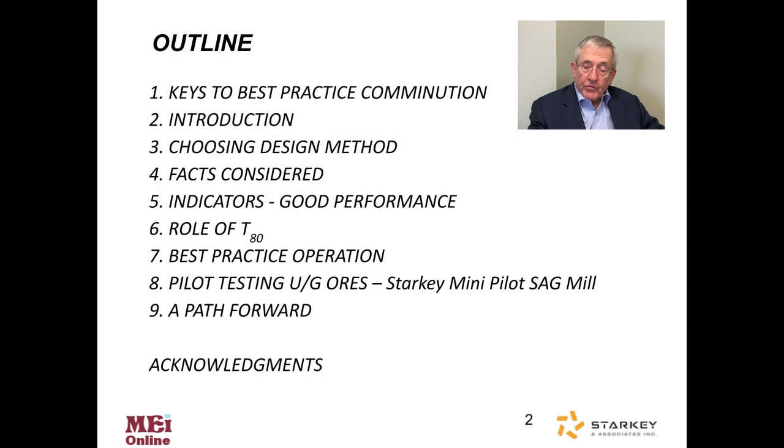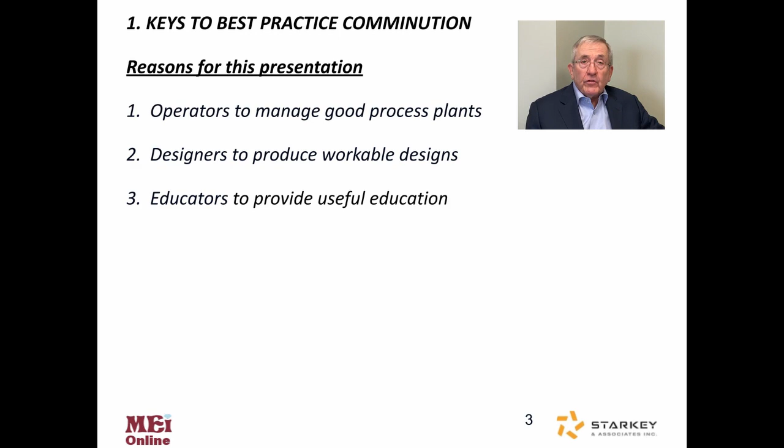The keys to best practice comminution. There are 3 reasons for this presentation: so that operators can manage good process plants and do it properly, so that designers can produce workable designs and include the features that are expected of a modern day SAG mill operation. And third, that educators provide useful education and information to not only university students studying mineral processing, but also to the operators who are going to run the plants that the designers build for them.

The term best practices is overused. We've heard it for the last 30 or more years, and people claim to know all about everything. So we should know something about this. But really, I have to ask, do we? SAG milling has been in our industry in Canada for 70 years or more, and it's always been presented as proprietary technology with the details obscured. We have to ask, why is that so? Is this in your best interest as somebody working in the industry, or is it in the interest of the person providing the information?

Make no mistake, a SAG mill is the heart and soul of every mineral processing plant that uses a SAG mill. Canada has seen many problems and massive financial losses in the last decade, and this talk should address some of the things that have caused those problems. As an industry, we need to attract sharp young engineers and always use best practices and immediately upgrade the teaching that our students in university are getting. It is unthinkable that a person can graduate from a university today and not understand how a SAG mill works or how it is designed.

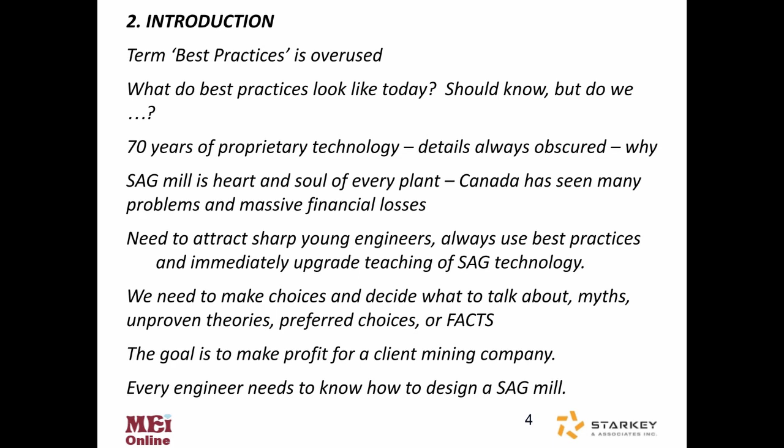So in this talk today, we need to make choices and decide what to talk about. Are we going to talk about myths, unproven theories, preferred choices, or facts? I think facts are the important thing here. The goal of a mineral processing plant and a SAG mill is to make profit for a client mining company. And I submit that every engineer who works in this field needs to know how to design a SAG mill. So right off the start, we need to decide the test and design method.

So rather than me tell you what's best, I'm going to ask some questions, which I think, if the answer is yes, will reveal whether you're on track or not. Does the method you choose to design your SAG mill have a track record that gives good design tons per hour from day one, with no modifications or extra expense to correct the problems in the design? Is the design for the 80th percentile of hardness variability in the deposit?

Can grinding test results be kriged in a mine plan? Some results can and some cannot, as was pointed out by Dr. Malcolm Powell at a previous Comminution conference in 2018, where he pointed out that the JK A times b cannot be kriged into a mine plan.

Is easy expansion part of the design? Because if it is, and provision is made to expand, then the front-end engineering cost to engineer the modification can be greatly reduced, and this is an important part of designing a plant, not just for today, but for the future and what we know is going to happen in the future.

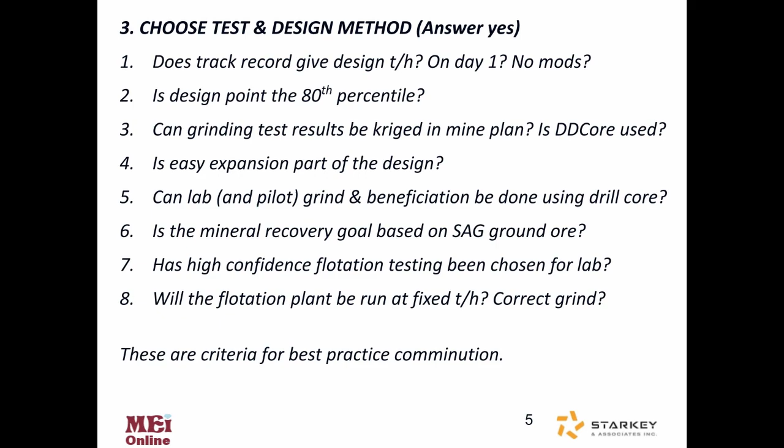These are the criteria for best practice comminution. Simulation without good kilowatt hour per ton hardness data, in my opinion, is now obsolete. It was okay before to consider that when we did not have accurate measurements of SAG hardness in kilowatt hours per ton. But because we do now, we shouldn't be comparing with other plants to decide whether this plant is okay, because simulation used that way propagates negative step changes if the mills are too small.

We build a new mill and compare it to mills B and C, and if they're too small, then mill A that we design is going to be too small also. So I submit to you that only hardness information from a client's own ore body should be used to design his SAG mill.

We need to do design work remotely in every plant, not just approach the professionals to do it, because people might be working in the Northwest Territories and the manager wants to expand his production and replace a crusher rod mill system with a SAG mill. His engineer should know how to do that, and he should not have to go and seek professional advice. Oh, sure, to do the final design, professional advice. But in order to get the project started, people have to be in the game. And that's not happening today, and it's wrong.

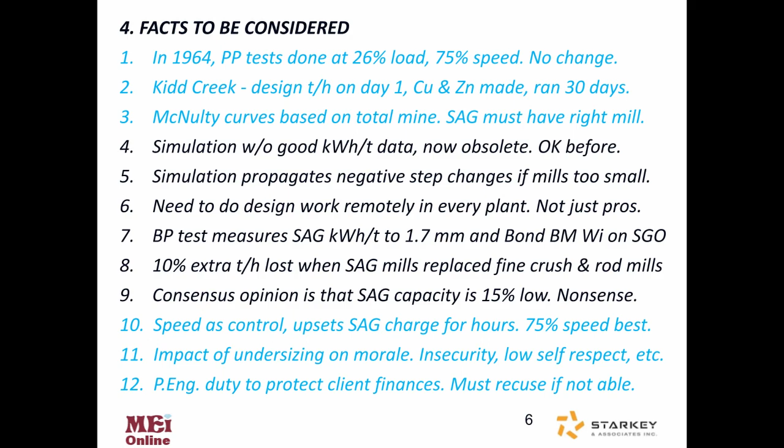Years ago, when we were designing crushing rod ball plants, it was expected that you have 10% extra tons per hour in the circuit. But we've lost that with SAG mills. Now we figure 15% less is okay. And many consultants in Toronto, for example, think that that's how a mill should be designed, to save money on capital. This is nonsense, because the saving in the size of the SAG mill may be $2 or $3 million, but if you're racking up 250 million in lost production in order to save that money, it makes no sense at all.

There are some indicators of good performance. For example, the capital feasibility study estimate is met and no additional funds are needed in order to get the mill up to full production. The operating costs are equal or lower than predicted in the feasibility study. Design tons per hour are achieved every day, and grade control is used to meet the budgets at the design cutoff grade. If you start changing the parameters of revenue and cost, really the whole financial structure for the project changes, and the cutoff grade should be adjusted, which plays with the value of the ore body.

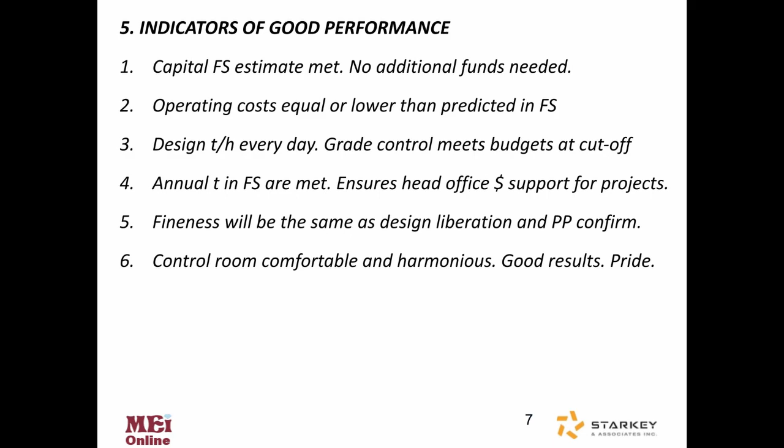The fineness of the grind will be the same as the design liberation and confirmed by pilot plant. Lastly, the control room will be a comfortable and harmonious place to be, where people sit down for a morning cup of coffee and talk about what's going on, and maybe spend a few minutes talking about the weekend and taking pride in their work. I think it's a big mistake to forget that part of an operator's life.

The role of T80 in SAG mill design. This has been and will continue to be a point of contention until we recognize what's causing it. The failure of the JK software to include T80 creates a misconception.

JK software was built on massive, well-organized research programs to do optimization work in an existing plant, not design work. Taking the design work from JK software and then using simulation to compare it with existing plants is just, and I'm sorry to say it, just not best practice anymore.

Any reasonable T80 can be used from 0.1 millimeter to 3.35 millimeters. Bear in mind that the feed to a bond work index test is 3.35 millimeters, 100% passing 6 mesh. And so the bond work index only applies up to that size. When we start extending beyond 3 millimeters to 4, 5, 6, and even 10 millimeter transfer sizes, we're actually asking the ball mill and the bond work index to grind coarser materials, of which we don't know the hardness unless you've measured it with a rod mill work index or a SAG test to determine how much energy you need to get down to 2 millimeters.

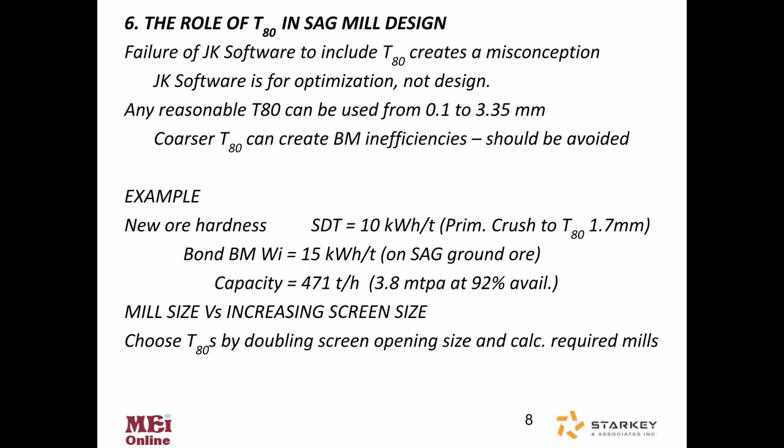Now, the reason the megawatts are high for the SAG mill option is because SAG milling does not enjoy the same benefits of decreased power at large diameter. So there's a penalty in power to use the coarse mill. But there's tremendous savings in both operating costs and ease of operation to run one mill instead of a SAG mill and a ball mill. That's why the single stage SAG mill should be evaluated as part of any study to pick the comminution circuit for a new plant.

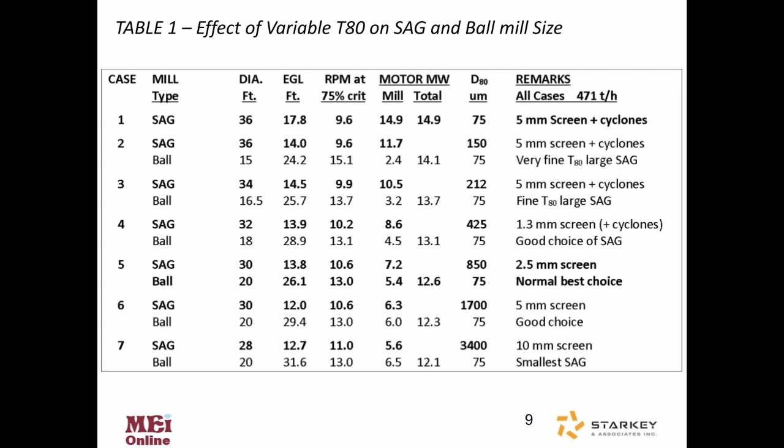And finally, the coarsest is a 3.4 millimeter, and that's a 10 millimeter screen. Now, the problem here is that many manufacturers will give you a 12.7, a half-inch trommel opening. And when they do that, they're really right on the bad side of being too coarse, where scats can get into the ball mill and affect the efficiency. That's why it should be avoided to go over 10 millimeter screen size.

So we've studied that table and made some comments. Case 5 is the normal choice, and it would be nice to have the table in front of me now to talk about this, but you can just review the comments here. Cases 4, 5, and 6 are all basically good choices, commonly used, because they all use screens. And a 32-foot diameter mill is a very common size.

And if you're choosing between a 30 and a 32, I would just offer the comment that a bigger size is like having money in the bank. You're going to be able to get more throughput in a big mill than a small mill. And if you're going to scrimp and save on the cost of your SAG mill, you're just inviting shortfalls in production down the road. So case 1 is a single stage SAG mill, and the reason it's great is that later on you can add a ball mill and double the production without spending a dime on the conveyors and bins feeding the ore to the mill.

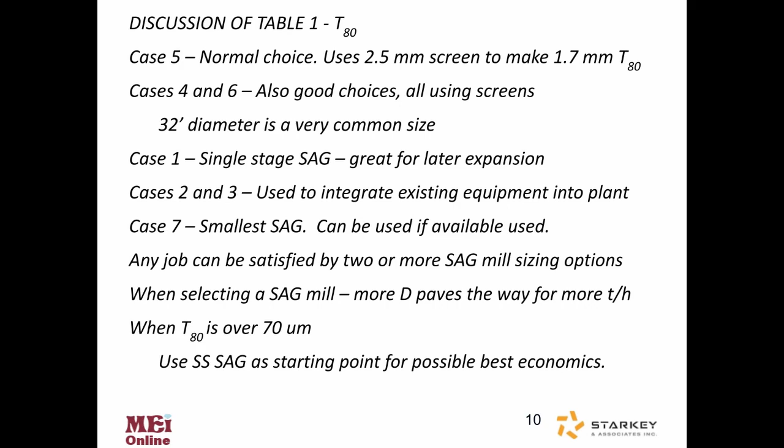Any job can be satisfied by 2 or more SAG mill sizing options. There isn't just one best. There's many options. So when selecting a SAG mill, more diameter paves the way for more tons per hour. And when the T80 is over 70 microns, I recommend using a single stage SAG as a starting point for discovering the possible best economics and to compare with other methods.

So let's just summarize best practice operation. The SAG mill is a good choice on any ore, especially for variable ores. Wet feed, clay content, frozen pieces all work well in a SAG mill. Now for super hard ores, where both the SAG hardness and the ball mill work index are 30 kilowatt hours per ton or greater, the energy costs may be out of line, making a crushing option feasible. I guess the way I'd summarize this is to say that any ore can be ground in a SAG mill, but a really hard ore, you may not want to do that because of cost.

Lack of water can also make SAG milling a hard option to recommend. And this has caused some plants to use dry, air-swept milling in the old Aerofall concept. But those plants are becoming increasingly rare because of the environmental hazards and the fact that there's a lot of wear cost involved in classifying dry ground ore.

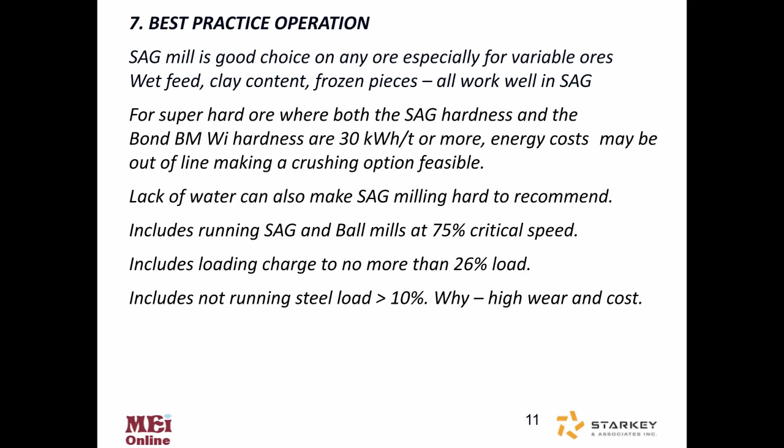And I think there's a lot more studies that are going to have to be done in the universities to prove what's really happening. Of course, you could overpower something and just put it up to 15, 18% steel. But I honestly can't see why that helps, because you're going to wear out your liners quicker, and every time you shut down to change them, you're going to lose production.

So rules for SAG mill sizing, some apply, and some designers, including manufacturers, really aren't aware of this. They don't want people, I think, to be aware of what these are. But when you have soft ore with a coarse liberation size, this can be a problem because you need to get the stuff out of the mill. And if you have a long mill, you can't do that. It's going to overgrind before it gets out.

So for SAG ball mill circuits, the diameter over effective grinding length should be over 2. And if it's under 2, then you really need to think carefully about why you're doing that and if it's going to work. Ball mills, on the other hand, length over diameter 1.65 is about as long as you should be going, because it becomes a tube mill when it gets over 1.65, and very difficult to get the ore out at a coarse size.

So a T80 between 1 and 3 millimeters in a SAG mill is best. The ball mill work index feed is about 2 millimeters, and the SAG design test was set up to correspond to that. So we find out how much energy it takes to reduce the sample to 80% passing 1.7 millimeters. And that's the thoughtfulness that had to go in to make the SAG design test as attractive as it is.

In single-stage mills, almost any configuration will work. It could be short, square, or long, and it's going to work fine because a SAG mill is the most forgiving piece of equipment in the plant. And it's remarkable that it is so.

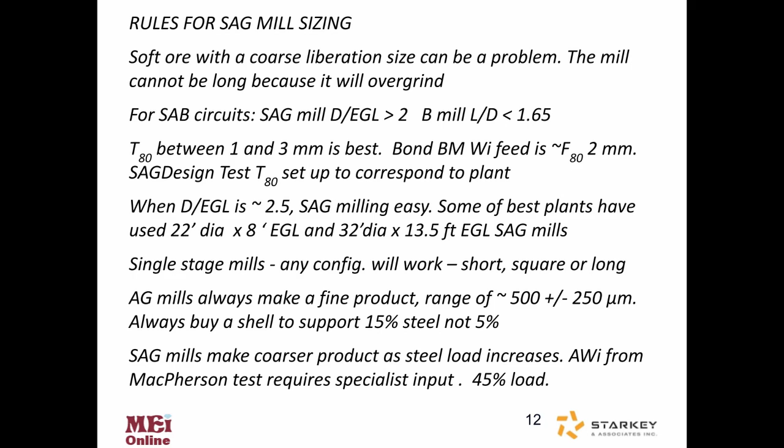The autogenous work index from a MacPherson test is something that really needs specialist input, and you shouldn't touch it unless you're a specialist, because that test is done at 45% load and really is not relevant to most situations. We now have pilot plant testing of underground ores. For 70 years, SAG pilot testing had not been done.

The East Kemptville was an example where they tried to do regular 6-foot diameter SAG mill testing. They drove an adit into the ore body. They did the testing at Lakefield, but the ore was discovered after several years of production not to be representative. And on top of that, the results came in too late.

We couldn't include the SAG mill in the plant anyway because it had already been designed with rod mills, and the SAG results arrived 1 month before the issue of the feasibility study that was used to build the plant. But it did prove that small scale tests are needed to measure ore hardness variability.

Actual pilot plant beneficiation work was done using ore crushed to 10 mesh. This is what people do now because they can't test SAG ground ore. They crush it to 10 mesh and do their beneficiation in a laboratory pilot plant ball mill. So no SAG has ever been used up to this point for underground ore where you can't get 6-inch pieces to put in the pilot mill.

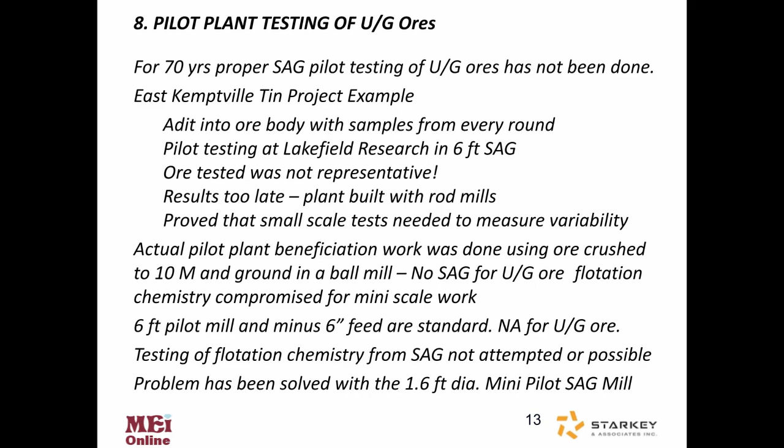But flotation chemistry is an important part of what's going to happen, and so this has been a detriment up till the present time. This problem, I submit, has been solved now with the introduction of a 1.6-foot diameter mini pilot SAG mill.

This graph was presented at SAG 2019 in Vancouver, and the significance of it was missed at the time, but the blue grinding energy reduction curve on the right is crucial to pointing out what we can do with this test now, because the energy that we indicate by using a test that's crushed to 80% passing 3/4 inch is still on that straight line.

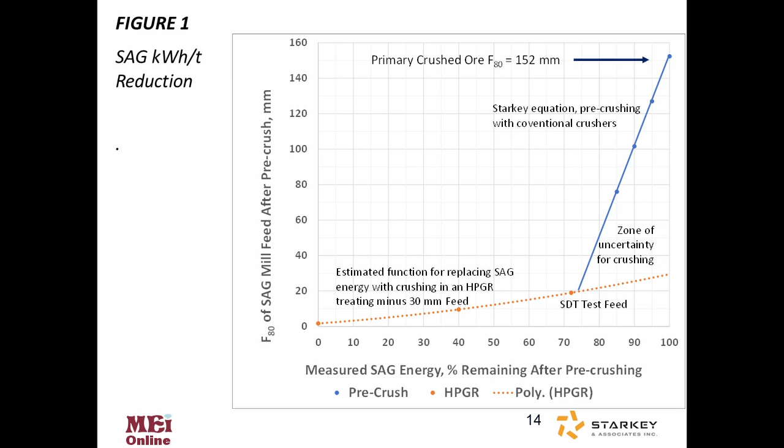And I submit that this is why the SAG design test works so well, and it's why the mini pilot SAG mill that uses the same size chamber as the lab mill and the same size feed, 80% passing 3/4 inch, is going to be perfect for doing beneficiation work on SAG ground ore in the new pilot mill. It's the same size as the laboratory.

The patent has been applied for to protect the data which has been generated over 17 years, and it lies on the straight line power reduction graph. Raising the SAG design test feed size to -1 inch is thought to be just above the finest point where representative mini plant beneficiation can be done on the mini pilot SAG mill product.

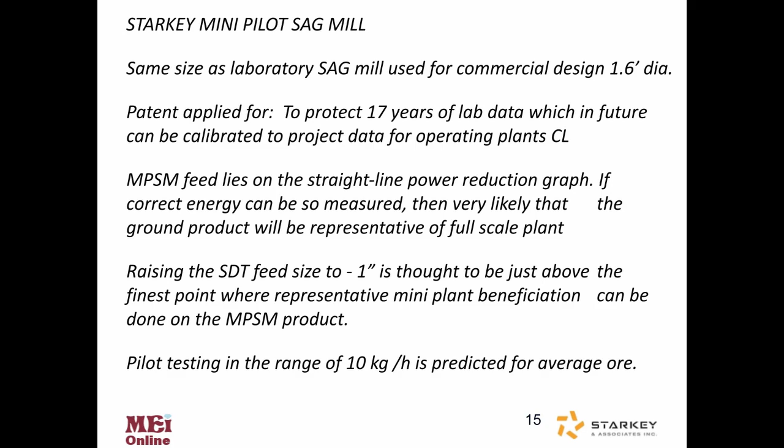It's sort of serendipitous that it's happened that way, but we need now to take advantage of that. And we're predicting about 10 kilograms per hour of feed on average hardness ore. Let's talk about a path forward. We need to restore confidence in the way plants are designed and built.

CIM should be involved, PEO should be involved, because it's professional engineering work, and there's really no work in the mineral processing sector that's more important than designing a SAG mill to the financial health of a customer. The JK optimization tool is excellent and must be retained.

It's astonishing that no place to add or use T80 in JK software was included, and the benefits of controlling T80 are lost unless redevelopment for mill design is done. We want to connect existing software with what works. SAG design test for mill sizing works. For this reason, the system is broken. Research time and money is needed to fix it, and it's no longer a job for one person. It needs a team and funding.